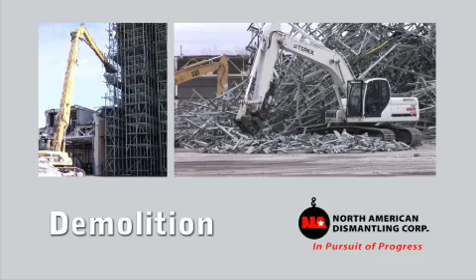In pursuit of progress, more than just a slogan, North American Dismantling Corporation is leading the way into the future with expert demolition services, helping to clear away the past by providing a clean slate for reclamation and new construction projects throughout North America since 1984.

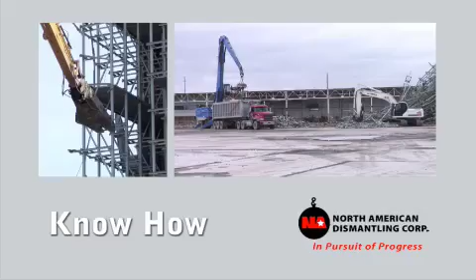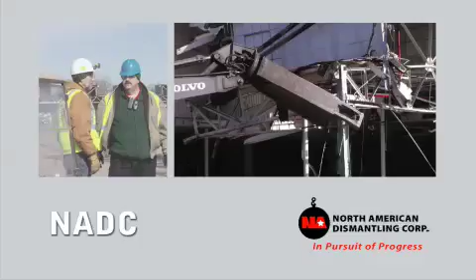North American Dismantling provides the know-how, specialized equipment, expertise, and professionalism to do your job and do it right. Specializing in heavy industrial and commercial demolition and environmental remediation, North American Dismantling, also known as NADC, has built a solid reputation throughout the industry by providing safe, on-time, and quality demolition services.

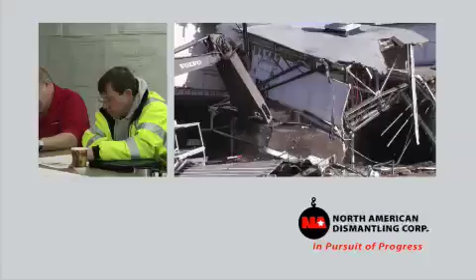NADC is committed to utilizing the most efficient, best trained, knowledgeable, and safety-conscious personnel in the demolition industry. You can be assured of the most comprehensive work plan executed throughout the project to maintain your schedules.

North American is, in my eyes and in the eyes of the people here in the company, we are a leader in the demolition industry.

The best projects are the ones where everybody knows up front what's happening. And if you have a bad job to start with, it doesn't get better. You know, it never does. Everybody has to have their hands and arms around what is going to happen and how it's going to happen. We can't paint a picture for an owner that isn't real.

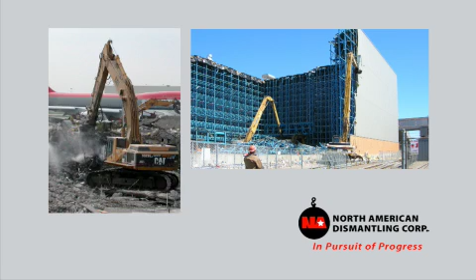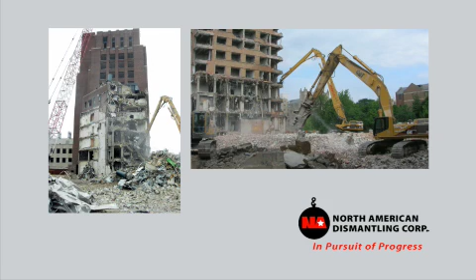NADC specializes in both light and heavy industrial removal, including plant strip-outs for the automotive, chemical, foundry, mill, and power industries. NADC has been involved in a wide variety of demolition projects for universities, hospitals, correctional facilities, and municipalities.

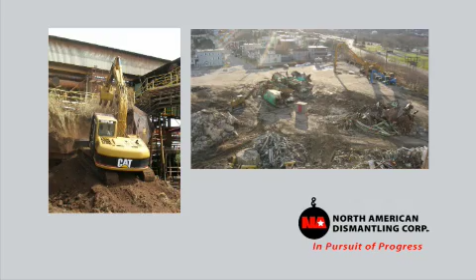Total site reclamation is obtained by clearing all hazardous and contaminated materials, including removal of underground storage tanks. North American Dismantling leaves your site in brownfield or greenfield condition, ready for new construction.

Our strength is in industrial equipment. We have double pump machines, 2-pump flow. We have approximately 5 50-ton machines in our fleet, 50-ton excavators.

We have Volvos, and the Volvos are the EC460s, and they've just been a marvelous machine for our company. We also have the CAT machines, the CAT 350s, CAT 345s.

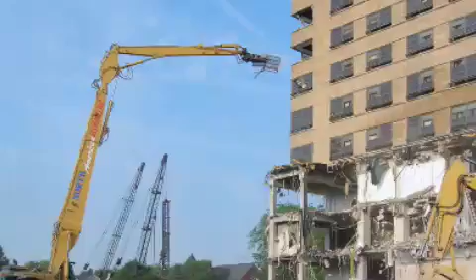In fact, we have 2 high-reach machines, the CAT 365 UHD, which reaches up about 105 feet, and a CAT 345 UHD, which is approximately 85 feet.

And you know, basically, that's precision demolition. If you've got a tight spot demolition program, that's the type of machine that you'll want to do it without having any collateral damage.

Anybody can tip a building or implode a building, but you get into a situation where you got tight demo and you have to protect the neighboring buildings, then you want somebody with high-reach equipment.

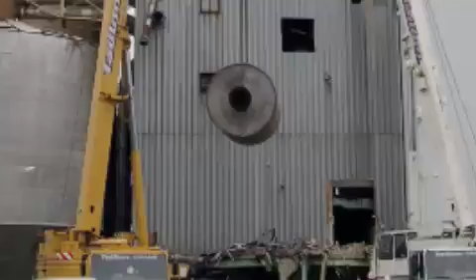The dismantlement of a specific structure or piece of equipment that does not involve bringing down the entire structure is known as selective demolition. Industrial plant strip-outs have become a specialty of North American Dismantling Corporation.

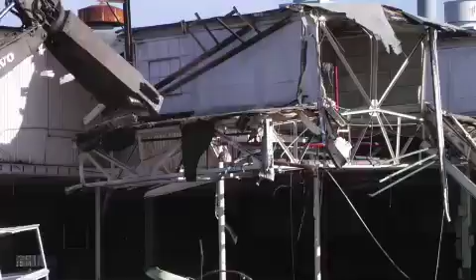Controlled demolition requires the highest degree of calculated precision when bringing down a specific structure without risk to personnel or damage to the surrounding structures or property.

NADC has the ability to use explosive or non-explosive techniques when controlling the fall of a certain structure, and the capability to bring down a structure within a controlled perimeter.

This can be accomplished using implosion on a multi-story building, or through tight spot tipping on silos, smokestacks, large antennas, and water towers.

Well, our company is based on honesty and integrity within ourselves and to our customers. So what I present to you is what you're going to get. And you're going to get honesty from us, and you're going to get a job that's well done, and whatever we say we're going to do, we'll do it.

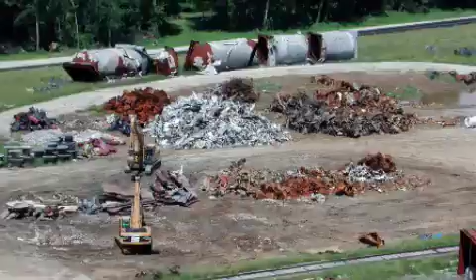Advanced planning for soil remediation, soil erosion control, site dewatering, and dust control are carefully considered well before site clearing or excavation projects ever begin.

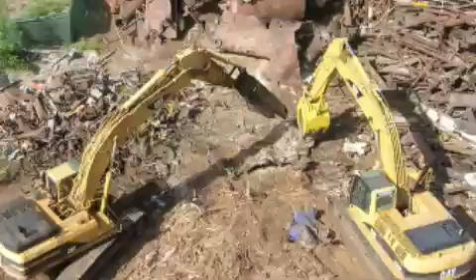Even after carefully examining prints and historical documents, heavy excavating equipment can reveal many unplanned-for obstacles within a given project. NADC has the expertise to examine these newfound challenges and to act promptly to remedy the situation to complete the job on time.

Everybody is concerned about dust control at the job site. That's one of the things that's visible to the neighbors, and a lot of these old factories are in bedroom communities. We do have 3 Dust Boss machines. In fact, we're probably one of the original purchasers of the Dust Bosses from the Chicago Dust Boss Company.

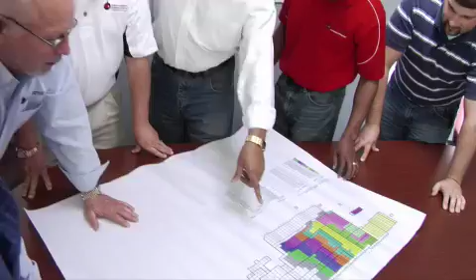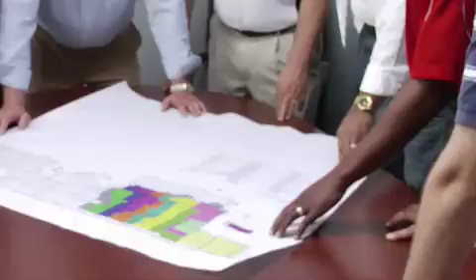Projects that require a critical lift or pick have their own unique characteristics. Each is carefully designed through the combination of structural engineers and the use of precisely the right equipment. Planning for safety, timing, equipment, and cost must be analyzed down to the finest detail. Working on these types of projects requires specialized engineering and depends greatly on the expertise of the riggers. Helicopter airlifts, manlifts, skytracks, and cranes are typical pieces of equipment used to dismantle structures.

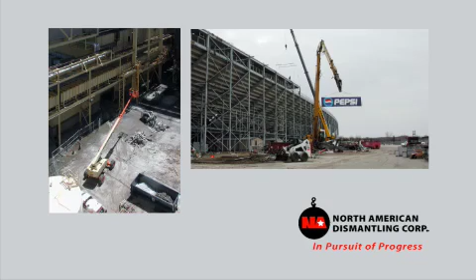Proper emergency response demolition means having the ability to respond to natural disasters ranging from collapsed multi-story buildings due to tornadoes, hurricanes, earthquakes, and even crime scenes that deal with arson. Unplanned-for events require quick response capabilities, including equipment availability and trained personnel.

We mechanically take structures down, strategically take them down within a certain footprint per the owner's description on how he wants that facility taken down, and it is a real artwork. That, in combination with the OSHA and the safety and quality laws that are out there, as well as the environment, it takes some real special know-how with expertise with equipment and manpower to do that.

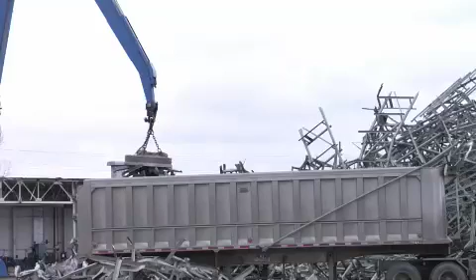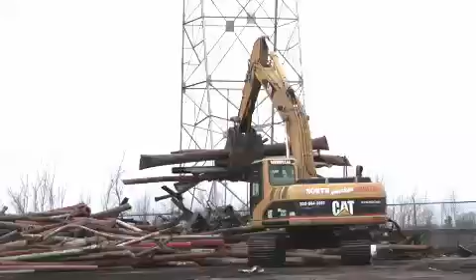A well-planned recycling program during dismantling means an improved return on investment when properly executed. Ferrous and non-ferrous metals are separated by material types. Contamination of other materials is prevented to increase value and facilitate easier reprocessing, creating the ultimate on-site recycling facility. When metals need to be segregated for accurate yields to determine weights and measures, or concrete and bricks need to be crushed for reuse, NADC accomplishes this by recycling tasks directly on-site.

Safety is definitely a factor. You've got your winter months, where most of the workload or work effort drops a few percentage points because of the cold, and the same factor in the summer because of the heat. You've got heat exhaustion, and just different issues that come up because of those environmental issues, because of the weather, the climate.

The other thing we should discuss is the safety of a project. We have an EMR of 0.68, I believe, which is outstanding in our industry. Typically, the major companies now are looking for an EMR of less than 1. I believe General Motors is down to less than 0.9, and they're working on less than 0.8. We've carried a less than 0.8 for the last 5 years.

The EMR stands for experience modification rate. It's an indicator of the lost time accidents you have versus the man hours you've worked on specific projects. You wouldn't have a customer base if you didn't have a safe record. No client out there wants a company that isn't a safe company. It's just a fact of life.